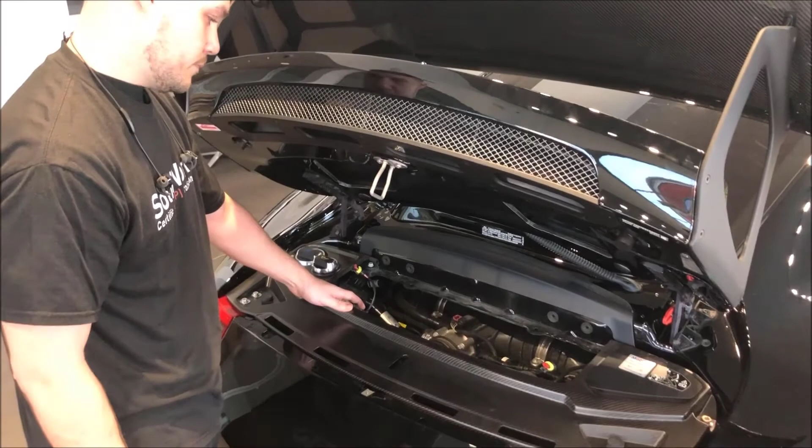So here we are again. So I wanted to check and see really if the car was prepared and set up and it was sound. So with all the work you've put into this thing, is this car ready and can it handle it? What are your thoughts on that? Are you kidding? That's what this car is made for. Do you think the driver could flatten the curve?

Wow, I like that. Speaking of flattening the curve, what engine is in this thing? This one has the Flat 6 4-liter, specifically designed in Germany just for the track. Wow, okay, so really, it's left up to the driver. Let's see if he can bring it, because we obviously know that the car can handle it. Excellent. That's exactly what I. So let's really see what a flat 6 sounds like, to see what our driver is going to be doing for us. That is the

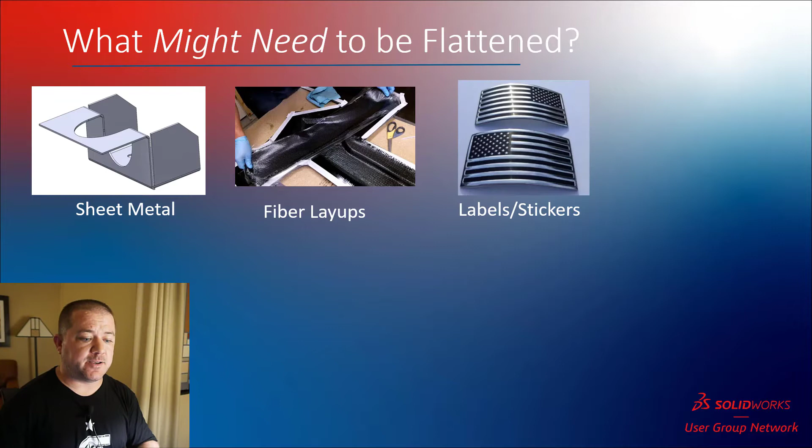When you talk about flattening things, it's important to understand what might need to be flattened. Okay, sheet metal ought to be obvious. That's the first thing that comes to mind. But what about things like fiber layups, right? You're putting sheets of fiberglass or carbon fiber into a mold. Maybe you're making a label or a sticker or something that's got a form fit over another part. Maybe you're doing NC cutting.

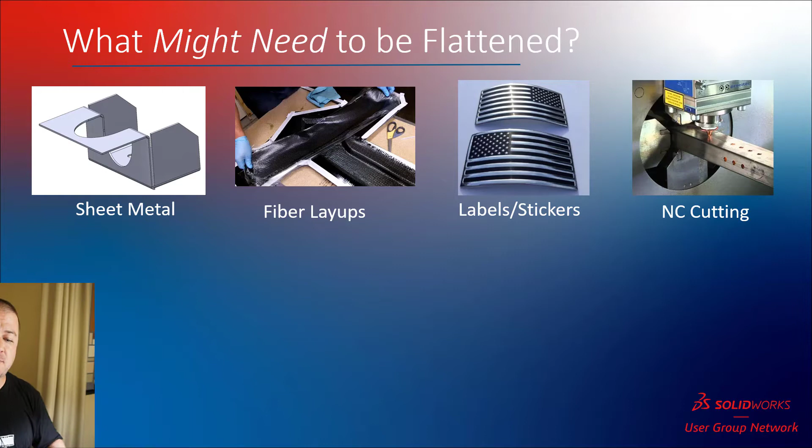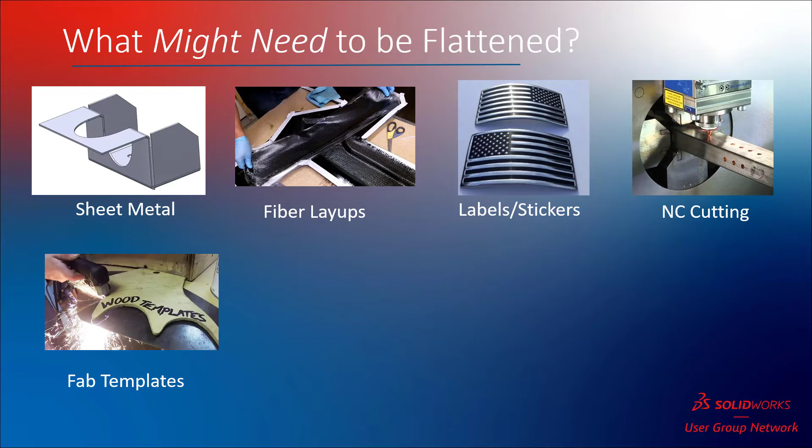A lot of tube cutters cut as a flat shape, but they're actually cutting around the perimeter of that tube part. So you're going to cut the holes all the way around, and then you're going to flatten that out and send it over to the NC machine. Sometimes you've got fab templates where you're creating something really weird shaped or possibly something that's almost impossible to measure. And so you're looking for some way to transfer the design using paper or something else that tends to be flat. You start to get into things like fabric and upholstery, then you start to get into stretch, and that starts to get a little bit more complicated.

Thermoforming, you don't generally actually need to flatten. You always thought thermoforming would need to be flattened, but you're always taking just a rectangular or whatever the machine takes, and then you just trim it off when you're done. So keep that in mind, that sometimes you need to flatten something, but the flat pattern is actually not important at all because the machine needs to have square stock. We also got cardboard, packaging, all kinds of stuff. The possibilities of what might need to be flattened is a pretty big list.

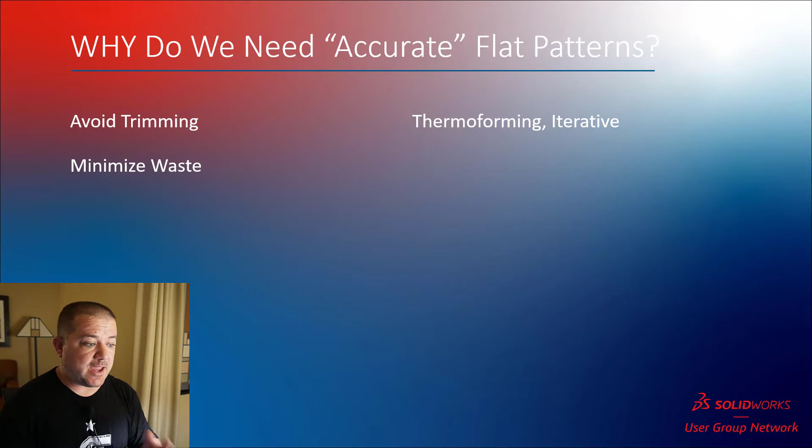The question then becomes, okay, why do we need an accurate flat pattern? Because I'll just give you a rectangle every single time, and as long as it's a big enough rectangle, boom, there's your flat pattern, right? Just trim to fit, beat to fit, paint to match, right? So we want accurate flat patterns so that we can avoid trimming, which doesn't always apply. Thermoforming doesn't matter. An iterative design process: if you're not married to the design, you don't actually care about the extra time it takes to trim a prototype. So don't worry. Does it really need to be that accurate?

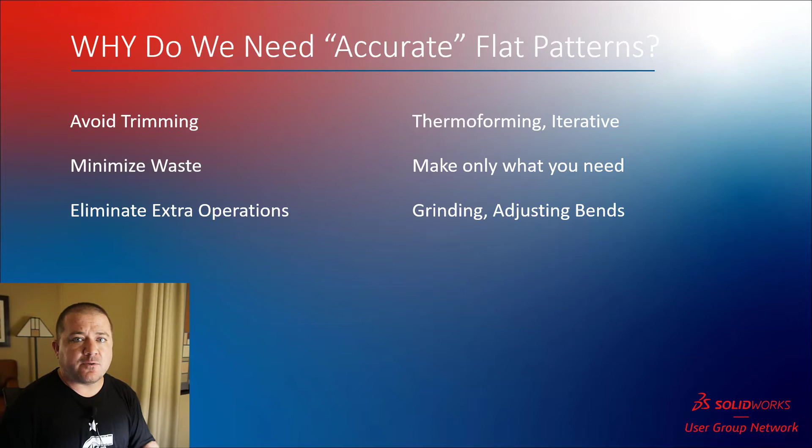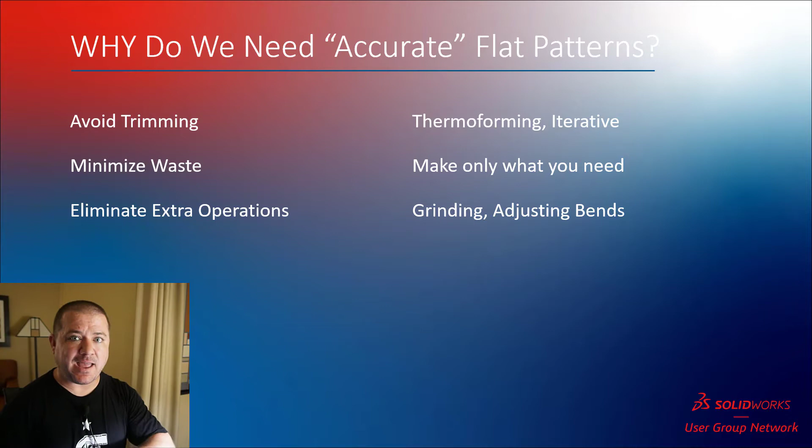You do want to minimize your waste because you only want to make what you need. So trimming extra stuff not only is wasted energy, but it's also wasted material that you could have put into another part. You want to eliminate those extra operations. A lot of times I find that if the flat pattern isn't right, you find yourself trying to dial in the bends. You want your bend locations and your flat patterns to be perfect so there's no excess at the end, no remainder. You want it to look really professional. You want tight, clean corners. You want to take advantage of the ridiculous accuracy that you get on a CNC machine, right?

Whether you're talking about a router, laser, plasma, whatever, you can flatten something and cut it out down to 1,000th of an inch, generally speaking, not necessarily repeatedly, but generally speaking, it's super accurate. And so then you can take that and use that as your assembly guides. You can make highly accurate parts, even though they need to be formed up.

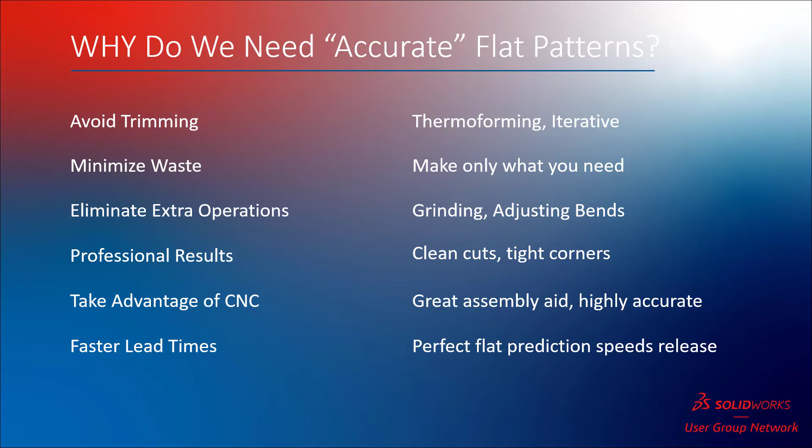If you know your parts are going to be accurate, you can get the parts out the door faster. You don't have to make a bunch of extras. You can just say, yep, I need 5. I'm going to print 5. I'm going to bend 5, and it's going to be perfect because I know it is every time I've got it dialed in.

Let's talk real quick about the anatomy of a sheet metal part that is a challenge to potentially work with. So what you end up doing is you look at a part that's crazy, and you say, okay, I could do it a lot of different ways, but first things first, focus on the largest part of the bends. Trace the outline and use a base flange, or if it's a rolled form, draw the arc of that roll. Try to get the bend in there first, because if you build the bend with sheet metal features, it's going to be a lot easier.

Now, for a really challenging part, you may have features that need to be added to the bent part, as well as features that need to be added to the flat part. So in this case, I'm trying to create a perfectly oval sticker or placard or something like that. And so I create the nice roll, because I'm not going to be able to roll it very well after it is turned into an ellipse or an oval. So I create the roll, I flatten it, I cut the ellipse out, and then I fold it back, and the flat pattern must solve.

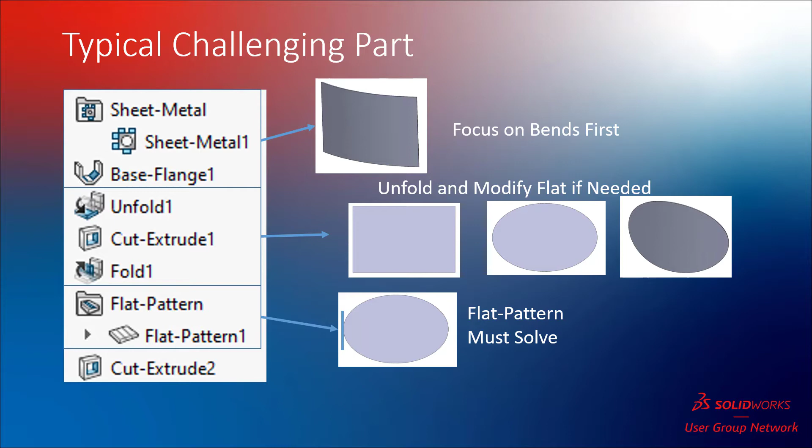Now, you may think, okay, well, that's obvious, but for those of you that have tried it, you know that at least in the past, you had to have at least one small straight edge to roll that back out with on a flat pattern. And so what I did here is on my ellipse, I left the tiniest little straight edge. And that straight edge allowed it to flatten, and then I did some cleanup at the end.

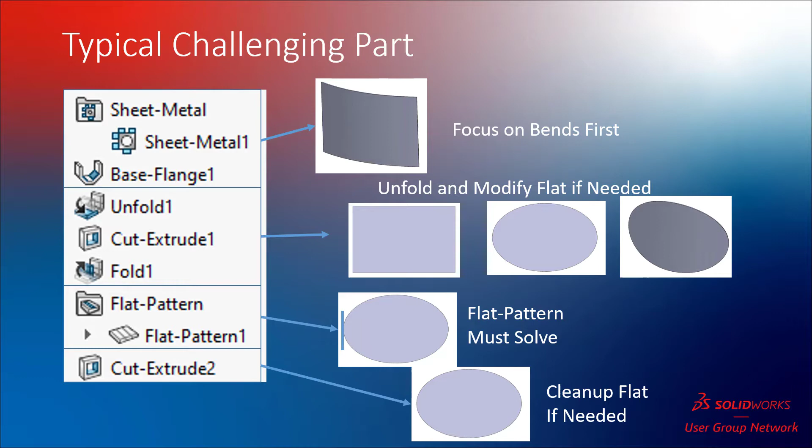So that's kind of how a lot of these parts end up going. You end up working on it in multiple phases: the bent, the flattened or semi-flattened or in-process flattened, the flat part, and then anything after the flat part that needs to be applied to make that work.

All right, let's talk about the rules. Sheet metal has rules, and just like rules in the real world, if you break big rules, you got big problems. If you break small rules, you probably get away with it, nobody's going to care. And if you break enough small rules, you're probably going to be cruising for trouble. So follow the rules when possible. If you can't, I understand. SolidWorks is probably going to take care of you, like we'll see here in a second.

So one rule, constant thickness. In other words, if you're going to have 16 gauge sheet metal, it's got to be 16 gauge. You can't create a chamfer on one edge and sharpen it, because that creates a situation where it's not the same thickness there at the corners. So constant thickness. The exceptions being that you can create non-normal cuts and do a lot of stuff with them.

Also, if you have something that's going to end up stretching, like a formed part that's drawn out, theoretically that's going to change thickness in the real world. We're not going to calculate that. We're assuming the thickness stays constant even though you're getting a bunch of stretch. Sometimes with imported parts, the constant thickness is messed up, and sometimes with convert to sheet metal, you can't have it flat. You don't want it to be thin. You want it to be a big chunky block, and then you just convert it.

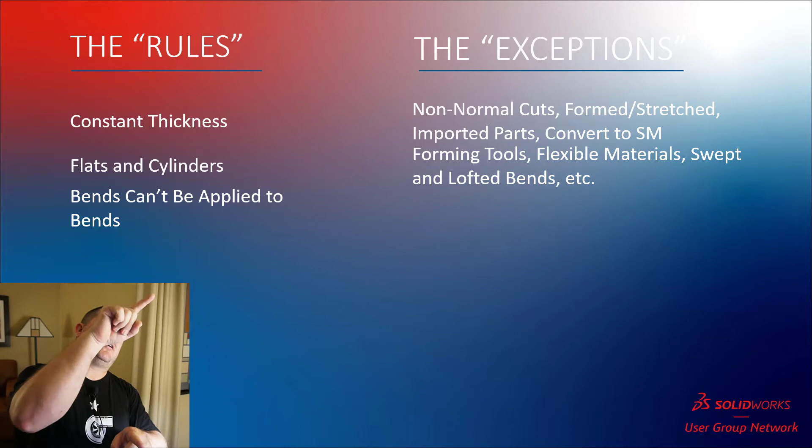You can't apply bends to bends pre-2020. They've changed this. It used to be, if you're on an older version, this does apply, an arc touching another arc with no straight in the middle would be a problem. Or even worse, an arc that then just took off in another direction. That's a bend on top of a bend that's going to get added on top of another bend. It just gets crazy. SolidWorks is like, you know what, I'll just take care of that for you.

So if you've ever run into a problem in the past where your lofted bend or swept bend or something like that didn't flatten, it probably does now with no problem. It's just boom, automatic.

You can't have parts that are overlapped. For instance, when they bend, if the parts are overlapping or intersecting, it can't physically happen, and it can't intersect in the flat. But there are times when, for whatever reason, you need to cheat, and SolidWorks generally is okay with you cheating. It generally gives you ridiculous, impossible things and lets you decide, is that something that I can accommodate through other means, right?

Through stitching sheets together to create a flat that's impossible from a single sheet, but maybe it's from multiple sheets. Or maybe you've got two parts that need to touch because they're going to get spot welded together. Generally, that's going to work out fine, but just keep in mind, if you can keep a small gap in there, you're going to be better off.

The part needs to be manufacturable, and of course this is all sort of just up to you because you're the one that's stuck with it if you can't manufacture it. But there are some really cool tools out there where you can create, you know, completely enclosed cubes, for example. I mean, if you're making it out of a piece of paper or cardboard, then you can bend anything, right?

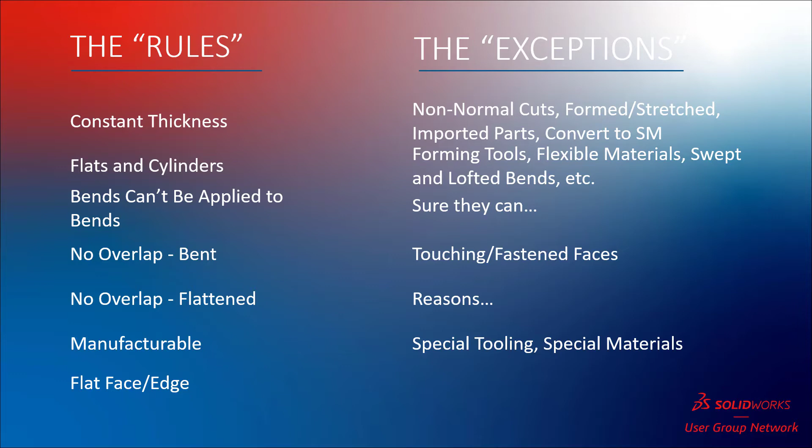So the last one, you need to have a flat face or a flat edge, and that's because the flat pattern feature at the bottom of the feature tree has to have something to say this is the fixed edge or fixed face. It's got to flatten relative to some fixed object. So make sure you have a flat face or flat edge.

That one's a pretty good one, although keep in mind, kind of like with that elliptical label example I did just a second ago, you can have a flat edge that exists in the flat pattern, but then gets sort of trimmed or eliminated after the flat pattern in a post feature. Okay.

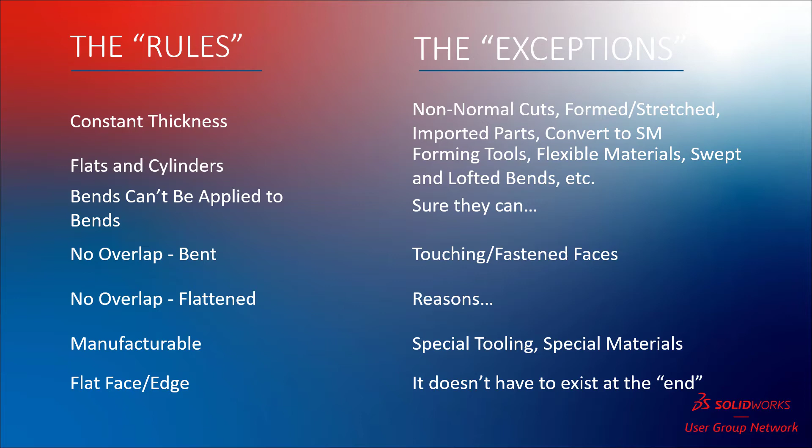This is required knowledge. You need to understand bend allowance, bend deduction, K-factor, etc. Generally speaking, when you go and talk to the guy that runs your brakes, the guy that runs your lasers, everybody that works with sheet metal, and you ask them, explain to me what bend allowance is versus bend deduction, and why would I use one or the other, you will get a different answer from every single person you talk to.

The thing of it is, bend allowance, bend deduction, those are old school AutoCAD 2D rules of thumb. They work really well, but they were based off of the same dies on the same material, and if you have a different bend angle or a different bend radius or a different die set or a different humidity in the air, it's going to stretch a different amount. And you'd have to manually keep track of this all. So I don't recommend using anything but K-factor just for simplicity's sake. I'm lazy and you should be too.

So K-factor is usually 0.3 to 0.5, and the idea is K-factor is the percentage through the thickness that you're not getting either compression or expansion in the material. When you bend, it's compressing on the inside, expanding on the outside. Somewhere along there is a neutral line. If it's perfect, then that neutral line is exactly halfway through, and that's a 0.5 K-factor, which is the default SolidWorks value.

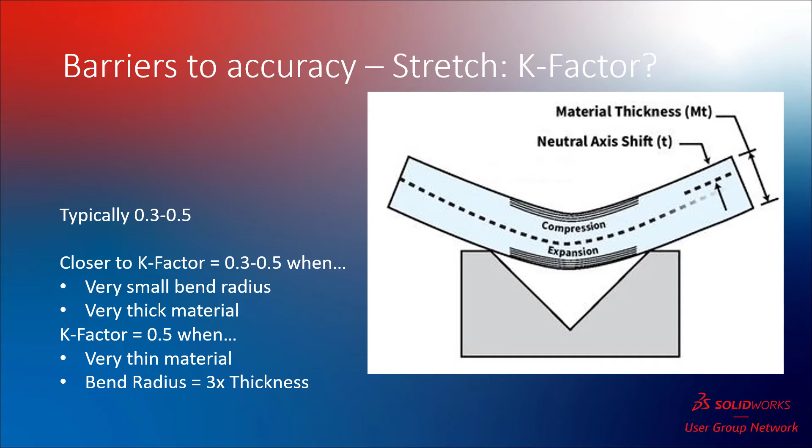It also helps to understand which direction you're solving for, because depending on what direction you're solving for, that's going to be where that K-factor applies. So for example, let's say you're doing a rolled cylinder, you know what the diameter of that rolled cylinder needs to be, you know the folded part. You design it in SolidWorks and you solve for the flat. If you adjust the K-factor, that tube will not change size, but the flat will. It'll get longer or it'll get shorter.

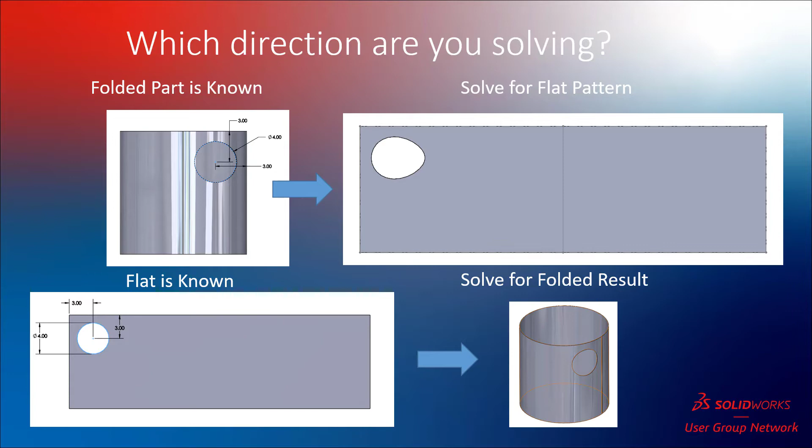Now, if you know what the flat needs to be, such as you want to cut a round hole because you're using a punch, but then you're going to roll it up and you want to see what the shape is, you'll build it in the flat and then you'll roll it up. In that case, the K-factor is applied to the folded part. You always have to start with one or the other, and in fact, you can mix and match, but every feature has a design intent. The K-factor is translating from one design to the other.

And what do I mean by one design to the other? I mean, you've got two designs. You've got the flat and the folded. And they differ by, theoretically, a K-factor, and that's it. But in reality, sometimes you've got to get more creative than that. So let's do some examples. Let's start with just some regular sheet metal features. Just do something fun here.

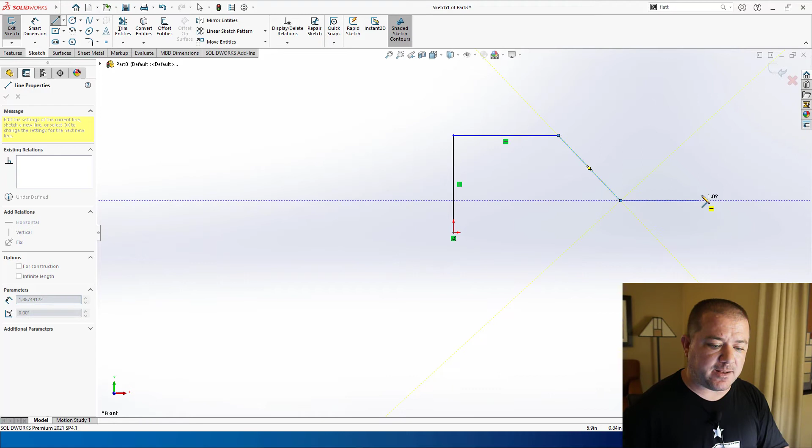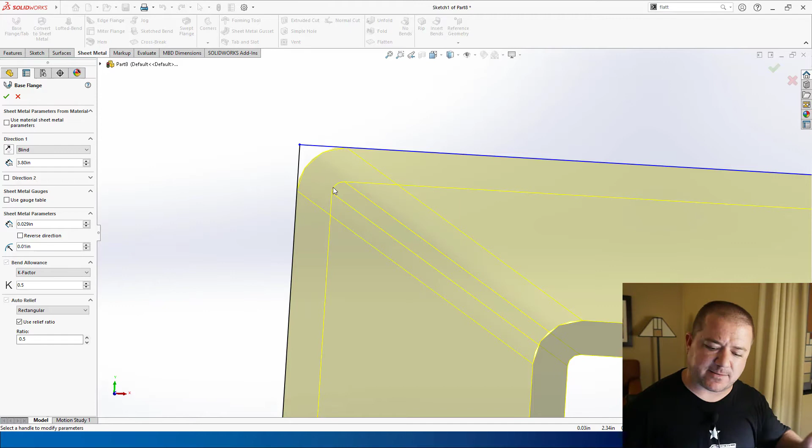So I'm going to go ahead and create a new part, real simple. And when I do a new part like this, especially in sheet metal, I like to try to get as many of the bends in there as I can initially. Then let's just create a weird shape. And we'll come up here to sheet metal and do a base flange. When you're doing sheet metal, you're almost always either going to be right on or you're going to be off by a thickness or two. Because if you're not paying attention to the thickness being to the inside or the outside, classic design intent mistake, you're going to have problems.

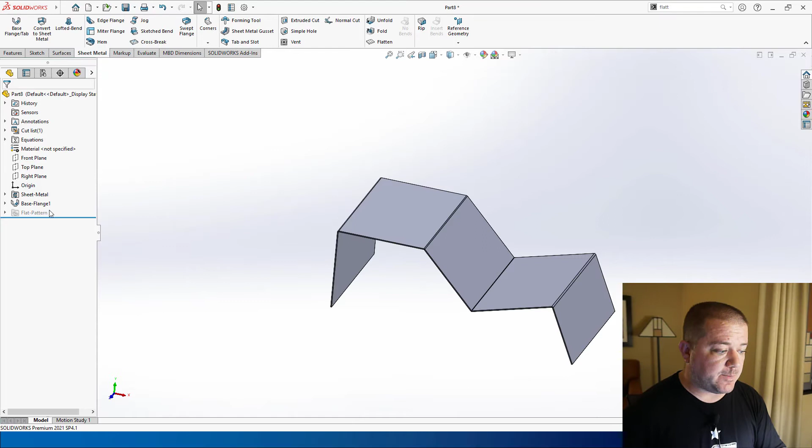So we're not focusing too much upon the sheet metal specifically, but if I come in here and I draw an open profile and I do a base flange, it creates a sheet metal part. And as long as you just periodically check, yep, it can be flattened, you're good to go. All right? Now keep in mind, remember I said you had to have a flat face or a flat edge? That's because this flat pattern feature here specifies where it's flattening from, and that stays put.

So if you ever decide, no, I want this to stay put and everything flattens relative to that, you can do that. I kind of liked it the other way. I'll switch it back real quick because that one seems to be more convenient. But if you ever have your flat pattern off at some weird, crazy angle, pick one that's sort of square with the world. You've got a bunch of other features, and as long as you do something in sheet metal and SolidWorks says it's a valid sheet metal feature, you should be good to go, right?

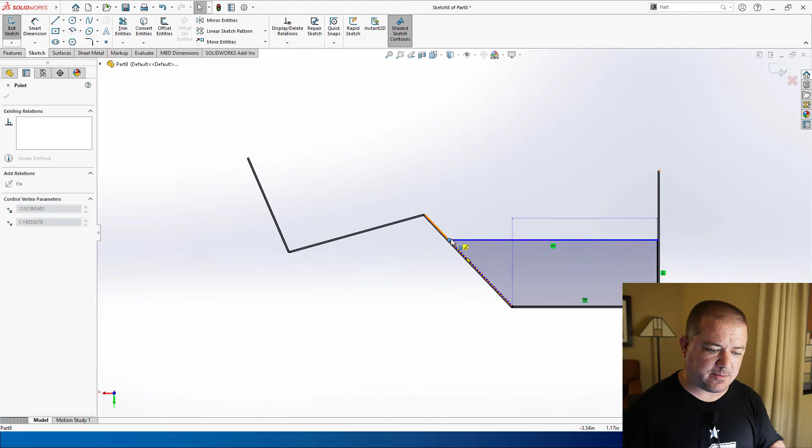So here's an edge flange, and I'm just going to come in here and modify this a little bit to make it line up here. That looks pretty good. This one actually blew up, probably because I tried to overlap. And remember what we talked about, you cannot have overlapping parts or touching faces. So we'll make this where it's not so mad.

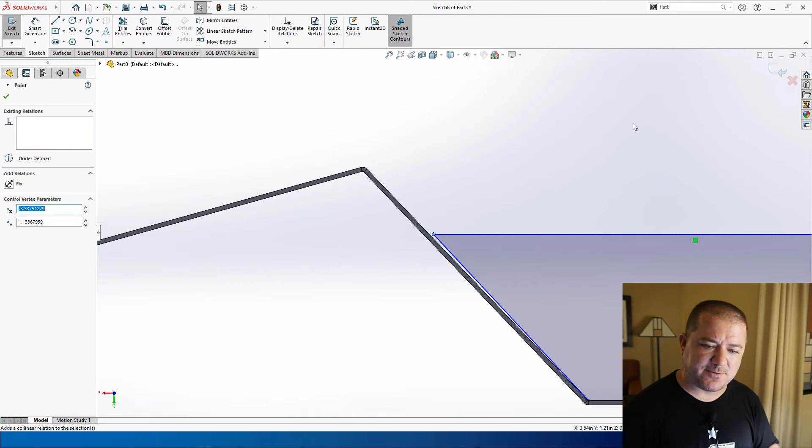And I've got auto rotate normal turned on because this is a brand new install. We'll tolerate that. Okay, so there's an edge flange. It flattens, right? No big deal. You've also got miter flange. If you do a miter flange, here's a little tip.

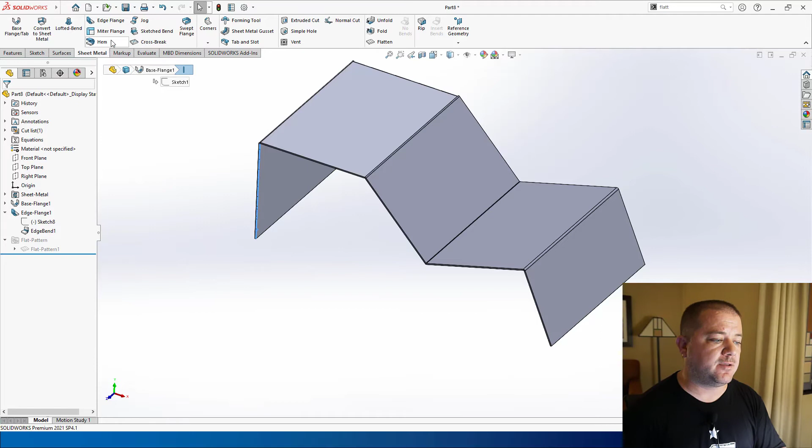Grab the edge you want the miter flange to start at, near the edge where you want to draw it, then hit the miter flange command. Oh, actually, you've got to do it the other way around. Do the miter flange command, then click the edge. It creates a plane with the origin at the point, and as long as your profile is attached to that origin of that sketch, you're going to be good to go.

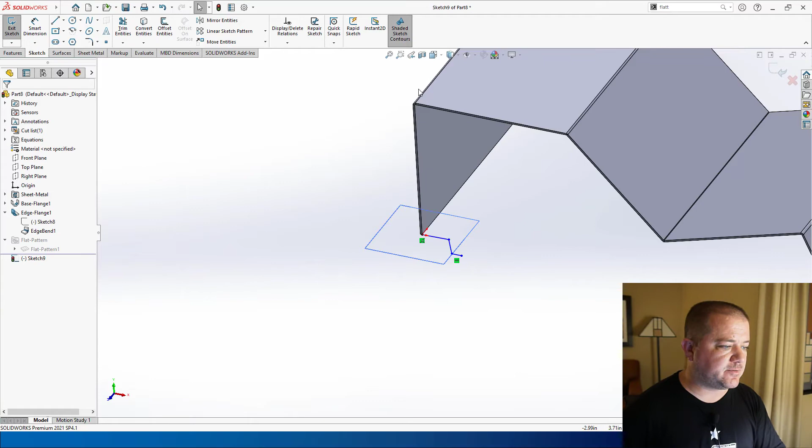So I'll just do one of these little dudes and click OK. Just kind of freestyling here. And propagate tangency goes through and does a nice job of taking that shape and creating a whole bunch of bends really quickly. Again, let's check and make sure. Yep, flattens no problem, other than that's interesting.

So that guy's giving me trouble. Let me try one more time real quick. I'm going to just turn that back to vertical and see what that looks like, because I don't really want to create a problem that later on is going to bite me, because I'm going to do some weird stuff.

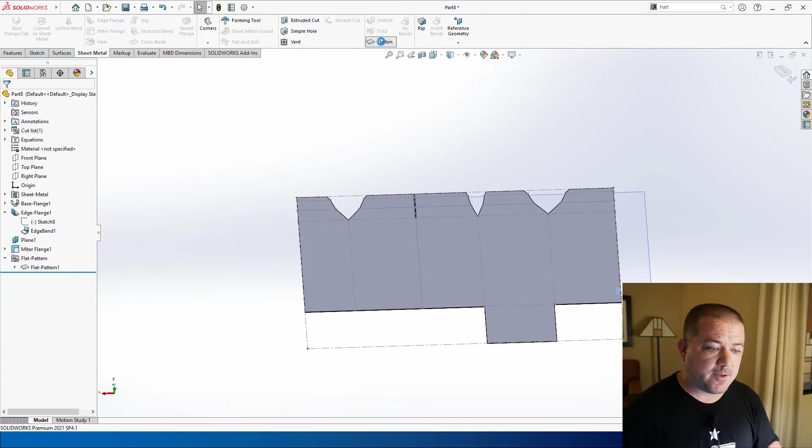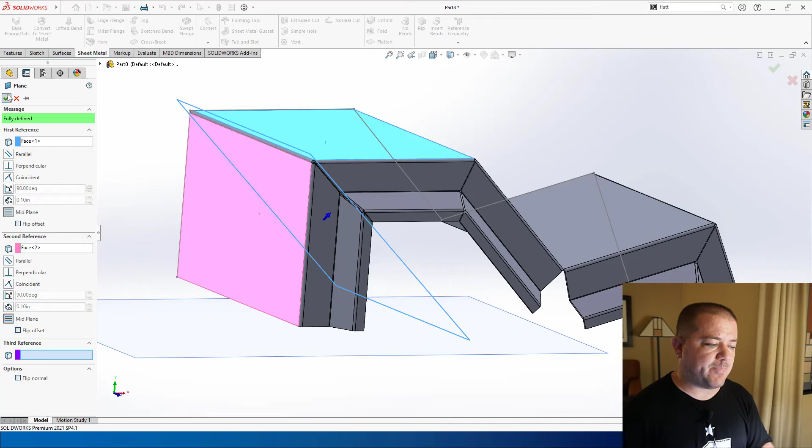All right, next thing I want to do is create a cut. And this is one of my favorite tips, shortcuts, whatever, with the new plane feature back in, I don't know, 08, or probably 18. Pick a couple faces, create a plane, it creates your symmetry. It back calculates a symmetry plane, which happens to be a perfect 45 on two normal faces.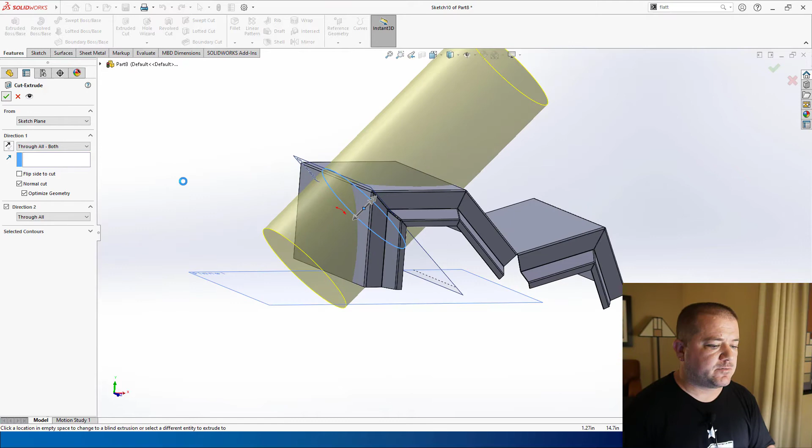All right, I want to run a pipe through all these faces in the sheet metal, right? It's a pretty common thing. Sheet metal has some hose, some structural pipe or something like that going right through it. So I run this cut all the way through, all in both. And by default, it turns on normal cut.

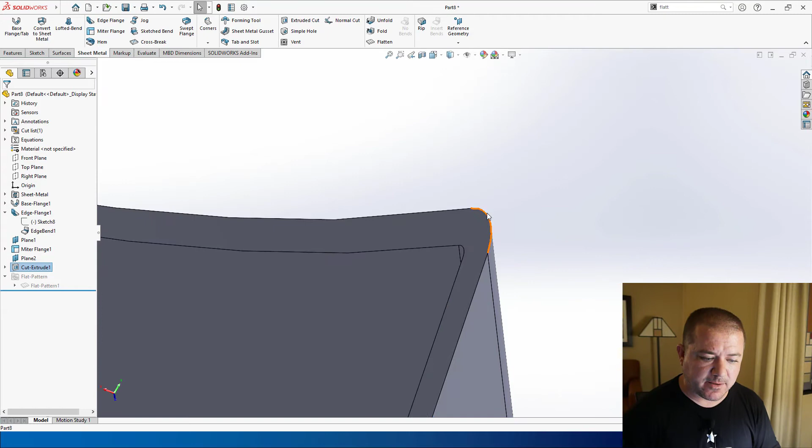And normal cut means it's going to cut a straight cut normal to the surface, so that when you flatten it over here, you've got nice, clean, straight cuts and everything's fine. Okay? If you want that to have sharp edges, you can turn off the normal cut, but you're going to break a rule. So if you're using an old version of SolidWorks, this is now going to hate you. But check it out, it's got a really sharp edge right there. It's going to slice your finger while you're holding the part, unless you deburr it.

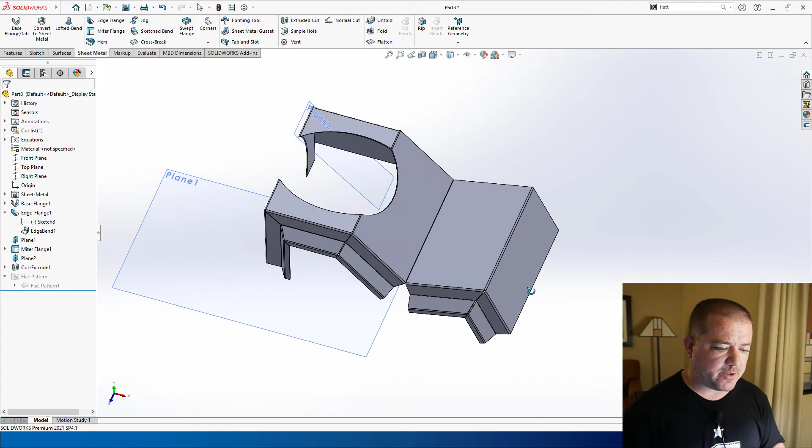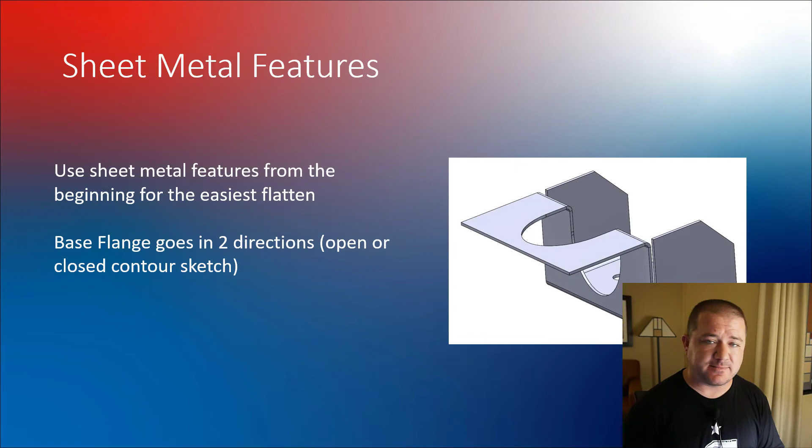But it'll still flatten. Yep, don't call me a liar, SolidWorks. You break enough rules and SolidWorks gets a little touchy. But you break a couple rules and generally SolidWorks is going to be fine with it. All right, so that's looking pretty good. At this point, you kind of get the idea, right? If you start with sheet metal features and stay with sheet metal features, you should be fine. It's going to work out. That's the easiest thing you can possibly do.

Insert bends is a really great way to take a part that's theoretically already sheet metal and add sheet metal features. So if you've got a bunch of old Pro E sheet metal parts, step files, old AutoCAD 3D parts, whatever, insert bends is absolutely the way to go.

It does have to have flat or cylindrical faces. It doesn't have to have bends. If it has bends, it'll capture them accurately. If it doesn't have bends, if the corners are square, it'll add your defined radius in the bend. So for this one, I'm going to go ahead and open one up real quick. I've got a part on my desktop here that I created earlier.

I had another example on this and I couldn't find it, but this is an imported STEP file and it's just a dumb, for lack of a better word, dumb solid. But if you say insert bends and you pick a flat face, Bob's your uncle, you've got a sheet metal part with intelligence. Pretty awesome, right? That right there is brilliant.

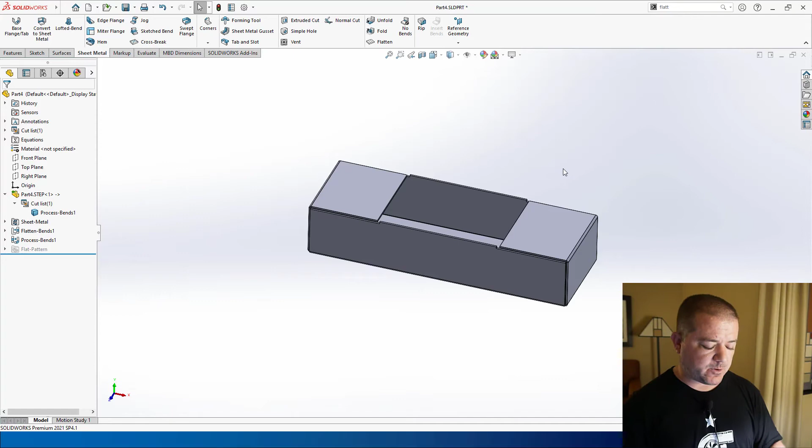And you should always use insert bends whenever you can if it's an imported model. Don't use convert to sheet metal. I'll show you that in a second. That's for other things. But insert bends, man, super stupid simple. Great. Convert to sheet metal.

Now this is one that has really grown over the years. It's constantly been improving. The corners are better, the error handling is better, the ability to handle arcs on arcs on arcs, all better. So this presentation has had to adapt over the years with the improvement in the software.

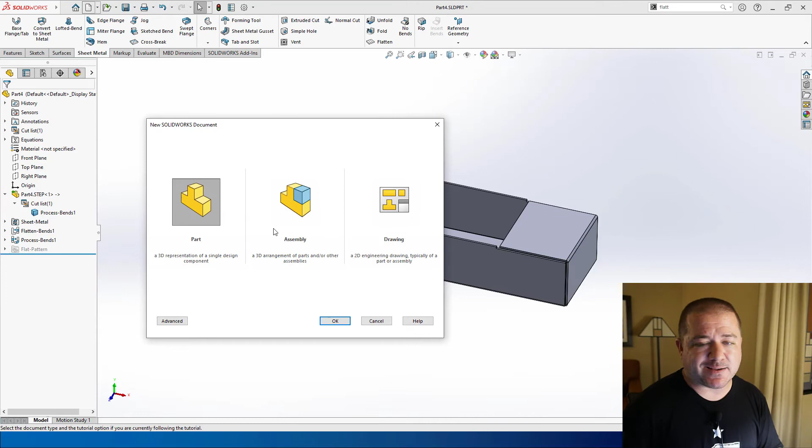But basically, if you've got something stupid or complex, like the classic example is a hopper, and you need to reverse engineer it, or wrap it in sheet metal, or create it out of sheet metal, this is sort of the way to go. And so for this one, just to show you what I would do, I like to just create a really stupid shape. I'm going to add some draft to it.

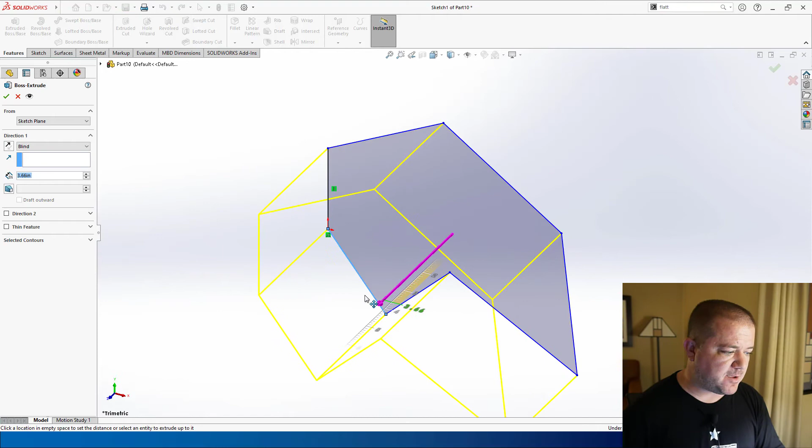And then I'm going to just chop it with, oh, I know. Let's draw a circle. Yeah, this is a terrible idea. We'll see how this works. All right, I want to make a sheet metal part that is this guy right here, right? I want to make a sheet metal housing that is that random drafted cut shape. Convert to sheet metal is your perfect way to do that.

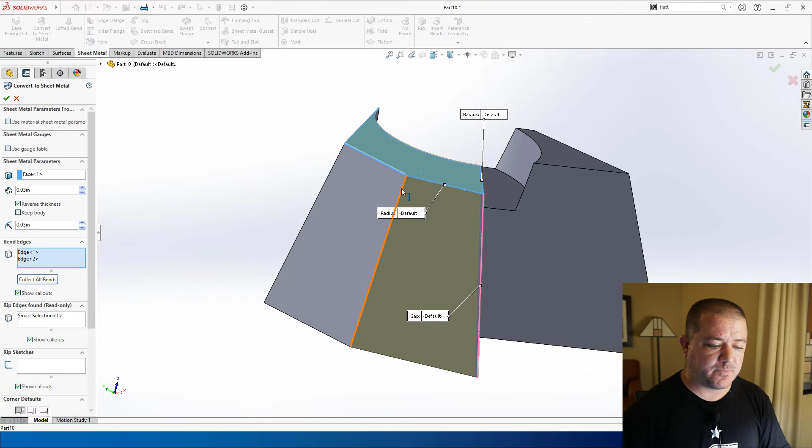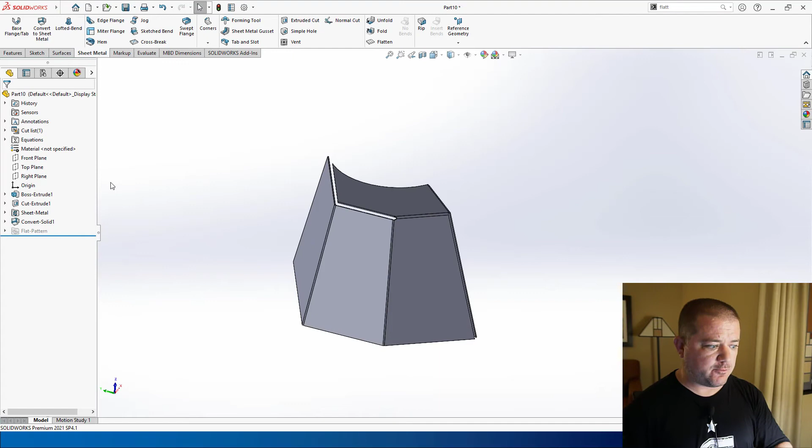And what it does is you say convert to sheet metal, pick a flat face, and then anywhere you grab an edge, it's just going to convert that edge. And if you pick in a weird order, it'll actually flatten in a weird order. So like this one right here, look at that one. If I flatten it, you can see it flattens out, but it actually created bends here, and then it sort of wrapped around the side. So depending on how you grab them will determine how that works.

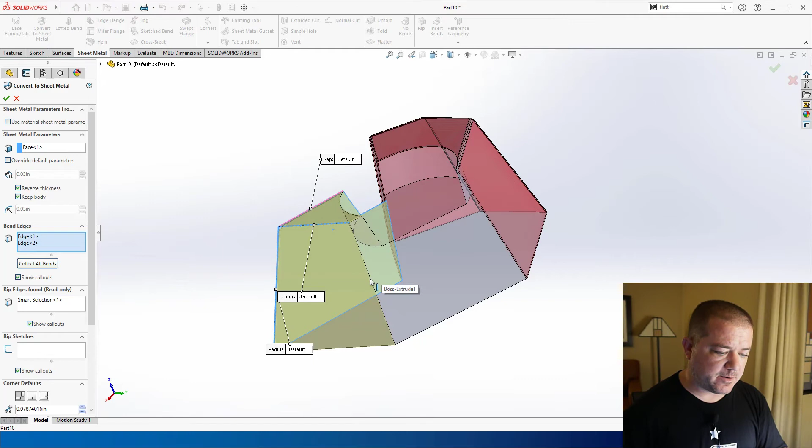Now for this one, I can't possibly make this whole thing out of one piece. If you need to create it out of multiple pieces, check the Keep Body button, and then you can just come in here and convert it again. So let's do this one, grab this edge right here, this edge right here. Now I'm sure this is not going to work. Yep, coplanar. But let's check this guy. Check that bad boy out. Right? I wonder if this will do it. Nope, doesn't like that one either.

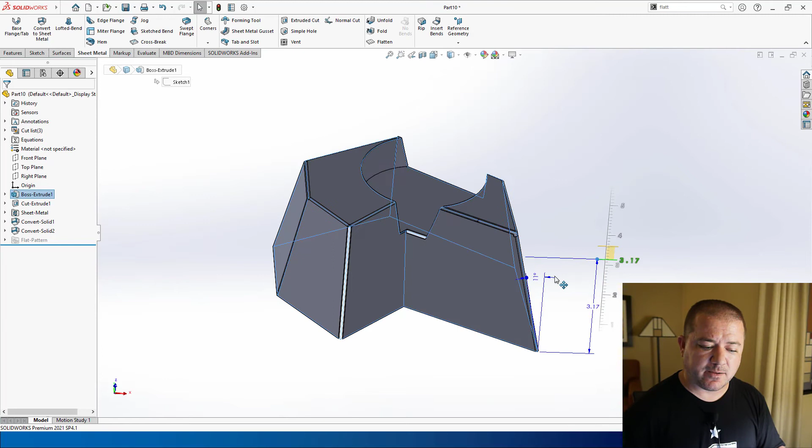So we'll have to come in and figure something out later, but there is a couple of sheet metal parts, very quickly created, and the beauty of it is any changes to the geometry and these flat patterns are going to update right away. Right? Change the draft angle, whatever. Looks like I'm blowing stuff up right and left. That's what you get with a live demo, but hopefully it's enjoyable. So just make sure that it can be flattened. A lot of times you'll see these where they overlap each other. That's on you. You're going to have to fix that.

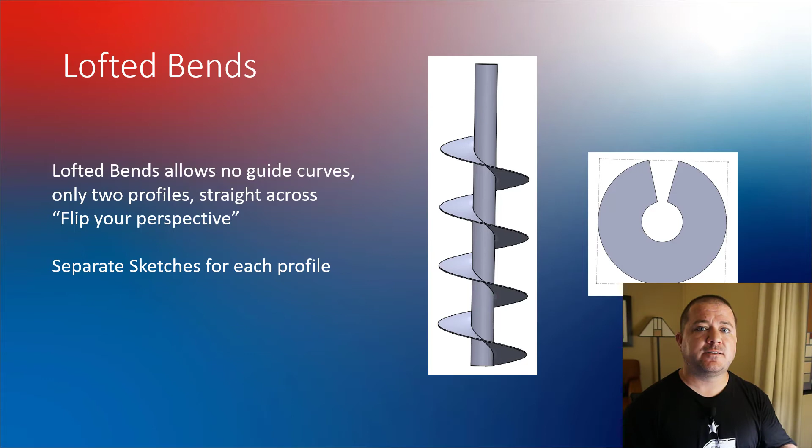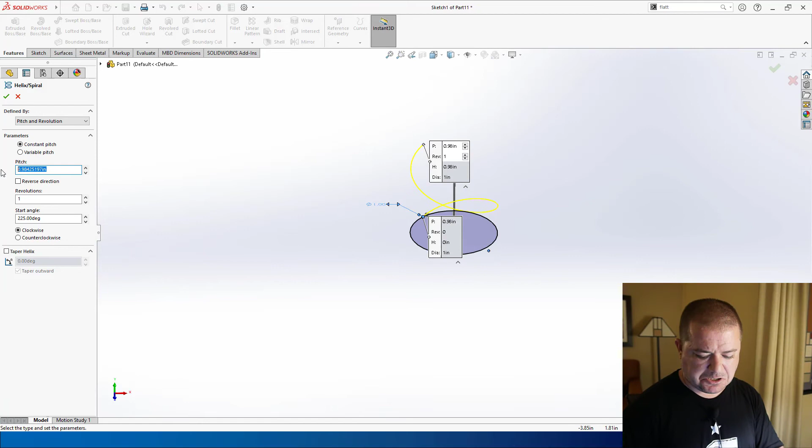But if you think about it, if you use helixes as your profiles, then they are straight across to the other side. Let's make one real quick, because this is a fun one. You basically just start a sketch. Let's do like a 1-inch hub on this guy. We'll do the first one first. And we'll go in here and say helix. And we want to do a 3-inch pitch, 1 revolution, start at 0 degrees.

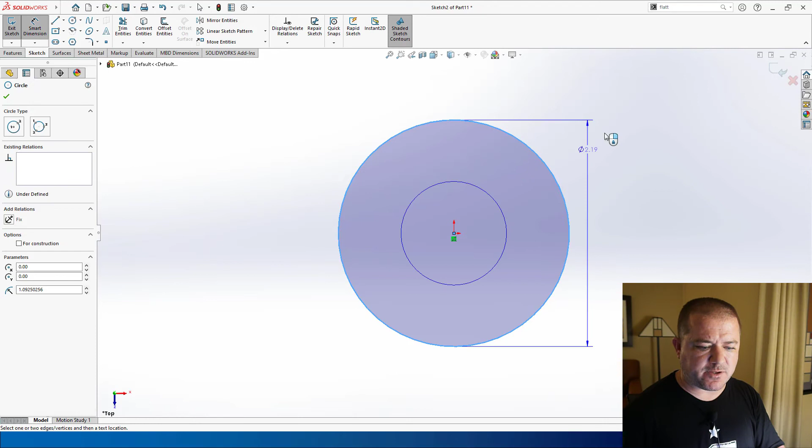Looks good. Now we'll do another one. Start a sketch, draw my circle, and we'll do this with like a 4-inch OD. So we're wrapping a 4-inch auger around a 1-inch post. Again, we'll do a helix, same pitch, starting revolution, everything like that.

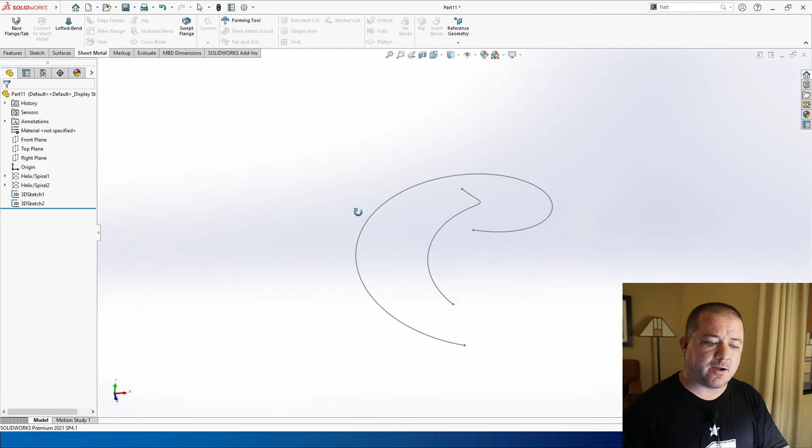You cannot create sheet metal lofted bend from a curve. So you got to do a couple additional quick steps. You got to create a 3D sketch for each one and convert it. There's 1. Here's 2. I find it's useful to hide my helix, otherwise you're going to accidentally grab it. The sheet metal's going to get mad. But there is a loft where those would have normally been my guide curves. I can now lofted bend from one to the other, from here to here.

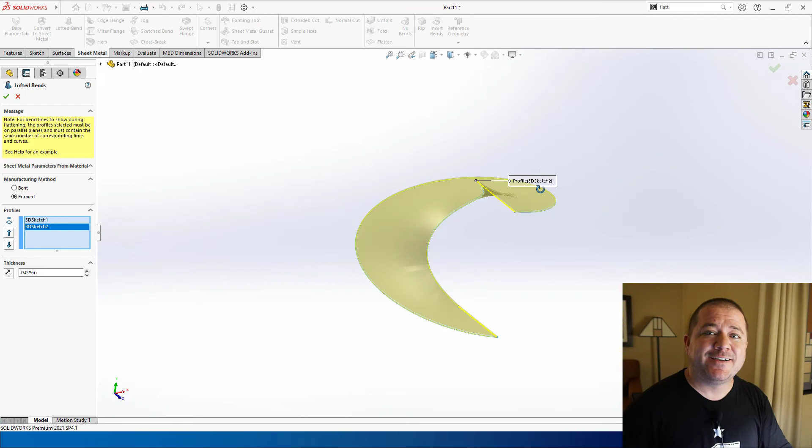Now, this is going to be a formed part. You cannot approximate this on a brake press. No matter how good you are with the brake press, that ain't going to work, right? You're gonna end up forming this with a hammer or something. But it does a nice job, and it flattens with no problem, right? Makes quick work of building an auger.

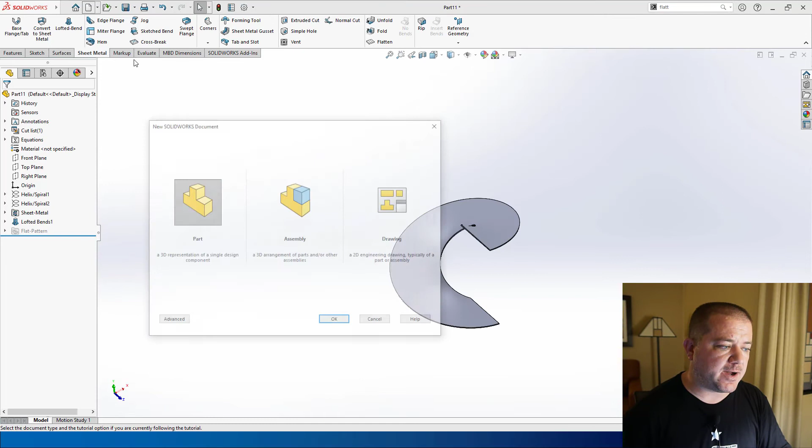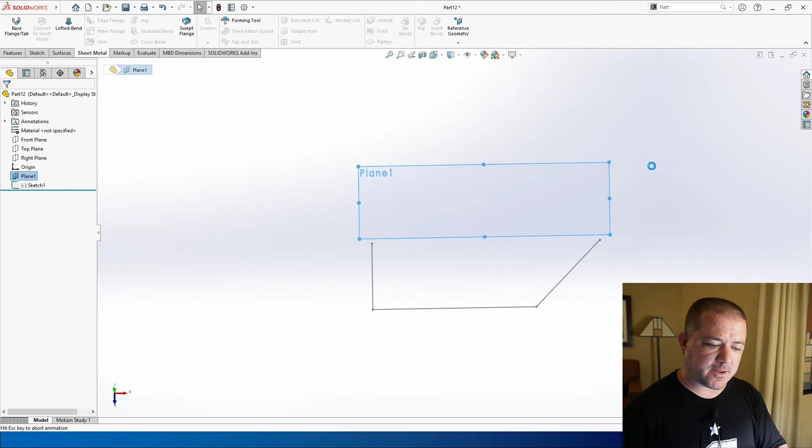If you need to do one where it's going to be approximated by a brake press, that's where you're going to have kind of that more classic, squared around. Or what's more likely or more common is maybe half a squared around. So you're doing like, let's do kind of a weird shape there. And then we'll go to like an arc here. Center point arc. Right? Lofted bend from there to there. This one can theoretically be approximated on a brake press, just like that. And so if you have something that can be approximated using straight lines, you're good to go.

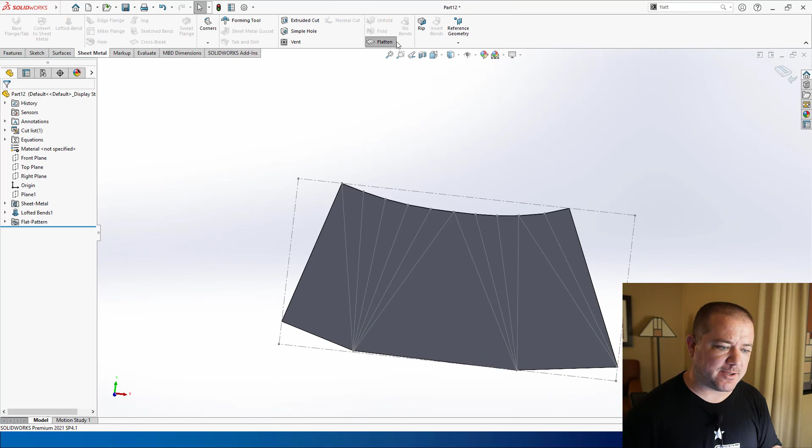This used to be so much harder. You had to do straight line to straight line. They had to be parallel. They had to be connected. Now it's just so easy. This presentation has gotten so much easier. I used to be always the stump the chump guy on support. Somebody's got something they can't flatten. They're like, "Hey, Marcus, you try to flatten this?" I'm like, "Yeah." My job's so much easier these days. So that's looking pretty good. Make sure it flattens. Looks good. Feeling good. Man, SolidWorks is just crushing it right now.

So are you flattening it along the path, like it's going to be rolled like seamless guttering from a straight strip? Or are you sort of flattening it from the side and sort of bending flanges down to form those shapes? Those are the two. I've been having problems with some of the flattening on that. I haven't looked at it again in a while. So it's a little bit weird, but you can get some pretty complex stuff there. Again, you may have to flip your perspective, right? If you think, okay, well, I can't do it that way because it's not a single profile. What if you do it from the side, do it sideways?

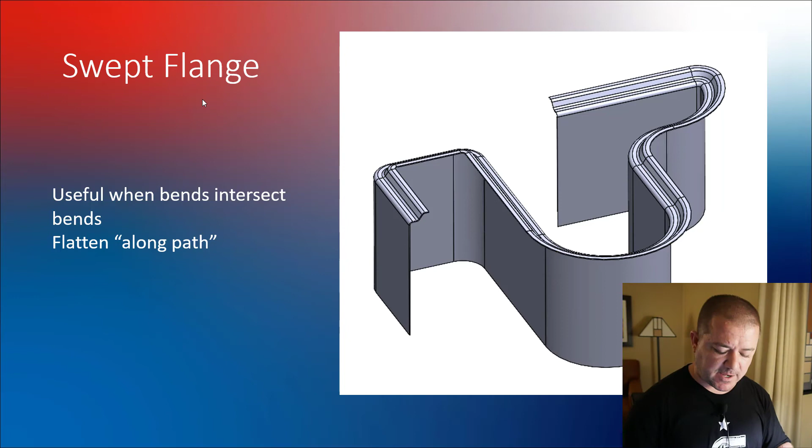Surface flatten. Right now we're getting really weird because surface flatten is a situation where it's not sheet metal, right? The auger is technically not sheet metal because you can't bend it on a brake press, but that depends on how you define what is sheet metal. You can do things that are non-planar, like drawing of metal. But surface flatten is when you really start to get some really crazy stuff going. It's about the most powerful thing you can do in SolidWorks when it comes to flattening things.

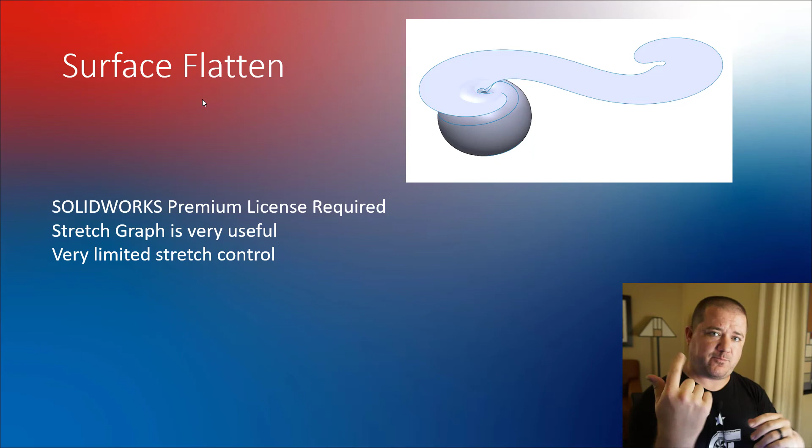I was doing a sheet metal training class one day, and I said, I bet I could flatten everything. And it's kind of the genesis of this presentation. And somebody said, "Can you flatten an orange peel?" And I said, "What shape? Right? Do you want it like a flower? Do you want it peeled in a helix?" And he said, "I want a helix." And so I did. And the different ways that you can do this vary because some of these get a little bit complicated. But let me roll this back here.

Here's one way that works probably better than the surfacing, because the surfacing can get a little bit difficult. You just create any shape you want, and then you go in and cut it with a thin rectangular cut. In this case, I did it as a swept cut on a helix and cut everywhere I wanted it to peel away, which is where the cuts would actually be, and then surface flatten. And it just flattens it.

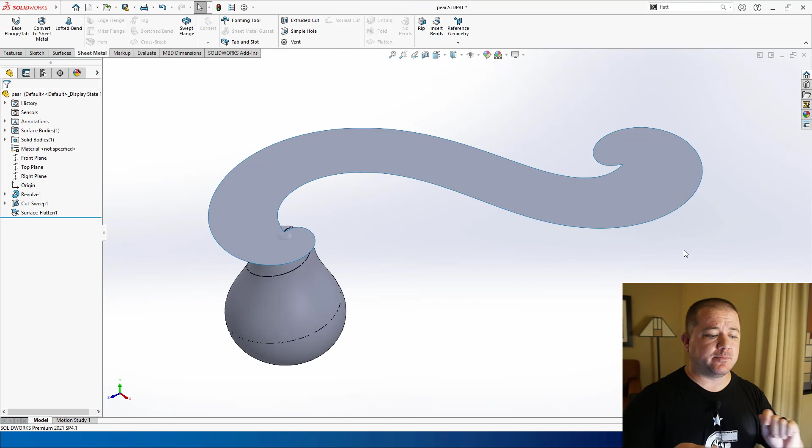Up on our social media for MLC CAD systems, I've got a picture of an apple peel that my wife did because she knew I did this presentation, so she peeled it in a spiral, and it looks exactly like this. Every time it looks this way, and you can predict it with some really great accuracy how it works.

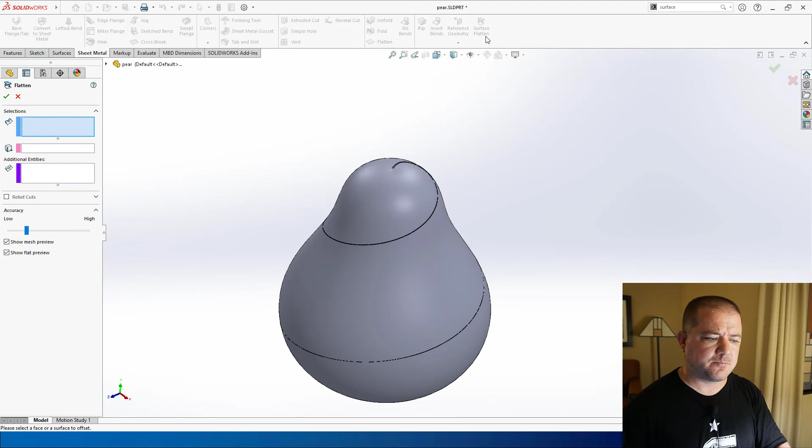To show you that last step, because preparation to here can get a little bit crazy, but once you get to the point where you have something that can be flattened, you just come in and grab the surface flatten command, and I usually have that on my toolbar. Surface flatten. Let me add that here. You pick the face you want to flatten, and then pick where you want to flatten it from. You have to start from a point of some kind, and depending on where you pick that point, that might determine exactly how it does it.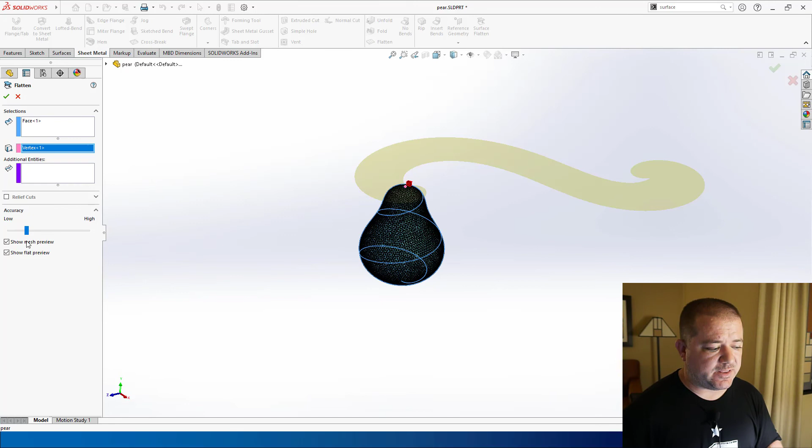But it's almost doing FEA on this thing. It just meshes it, and then it does it. You can adjust the accuracy. You can add relief cuts. But there you go.

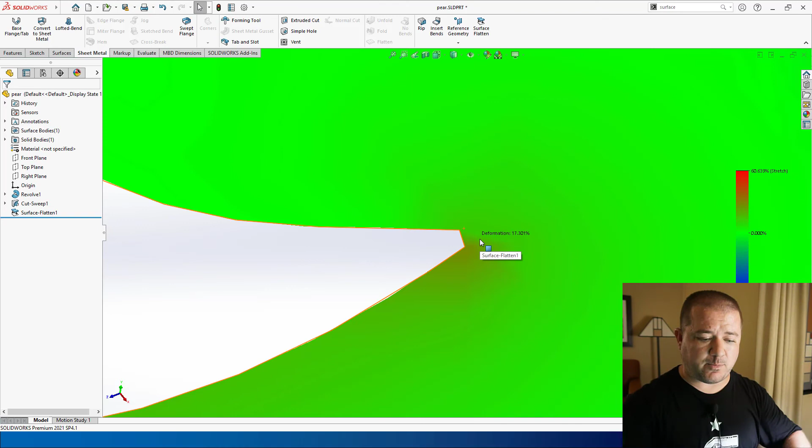The only other thing that's worth looking at is that you can right click and turn on the deformation plot. This is where you're going to start to see it either wrinkling or tearing because there's tension or compression. So this one has a lot of stretch right there at the top, and if you've ever tried to peel right down to that nub, that stem, you know that right inside there is a lot of stretch going on because it's sort of being turned inside out. Then you get a little bit of compression depending on how thick you make the peel.

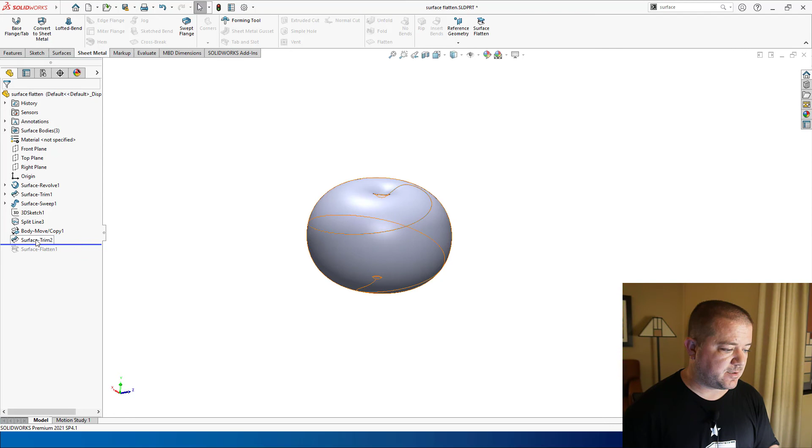I've got another one of these that I did, another approach using surfacing, but a couple of years ago that kind of broke it. With surfacing, you just have to make sure that the surfaces are not overlapping, so you typically need to cut a little hole in the middle, where you don't need to worry about that on a solid. But as long as you can trim the features, you should be good to go. Now this one, if it's anything like it was in 2020, I would try to do that and it would actually break. But in this case, this one's a little different.

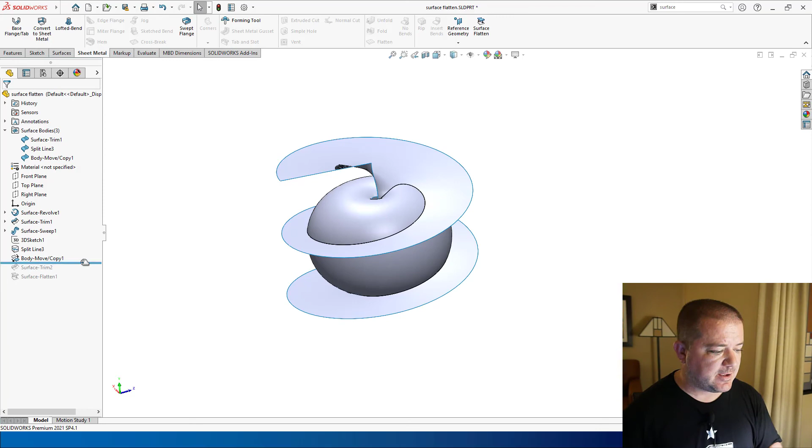I do the surface revolve, right? And then I come in and do my sweep. Then I do some split lines at the intersection. I copy the body so that I have two very close nearby surfaces. Then I trim them. You end up with like 18 features to get this done. It takes way too much time. The solid one I did as a workaround, and found out it worked a whole lot better. I was trying to be cute with surfaces.

Which brings me to sort of the bottom of the bucket, the bottom of the barrel. When you can't flatten it using one of those features, you've got to cheat. And as far as I'm concerned, cheating is totally acceptable. So for example, this was on a crimp connector where a little window was being bent out along the cylindrical face.

Remember when I said that sheet metal needs to be flat faces and cylinders? Well, if you put a bend on a bend, normal to a bend, it creates this toroid donut shape, and that's just a no-go. You can't put bends on bends. They're constantly making it better, so they're going to make me a liar in a couple years, but this is just a no-go. But the trick with this one is you don't need to know what the flat and the bent parts look like. You actually already know that. So why worry about SolidWorks figuring it out when you can just tell SolidWorks?

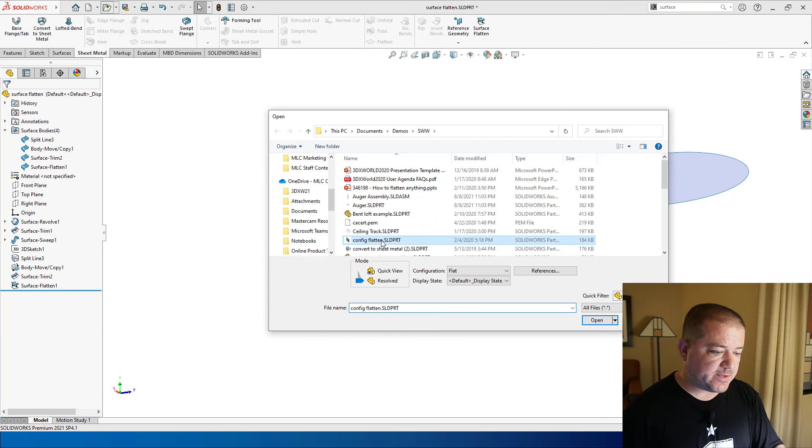So in this one, I did this one ahead of time because I didn't want to have to sit there and try to recreate it. But basically what you're doing, and I'll show you my feature tree, right? There is my bent part, and here is my flat part. And you're thinking, wow, that seems really simple. Bent part, flat part, right?

Well, the bent part, I had to do a loft to get this bend region, because you can see it's a bend that's bending, a bending bend. You can't bend bends in sheet metal. I had to do knits and surface thickens and all this other stuff just to get the shape right. And the shape's not perfect because I probably need to come in and like curve the edge here or something like that. But once you get the tooling and the machine that actually does this, you'll know what those measurements are and you can trim it up and make it look realistic. But I had to build that geometry completely.

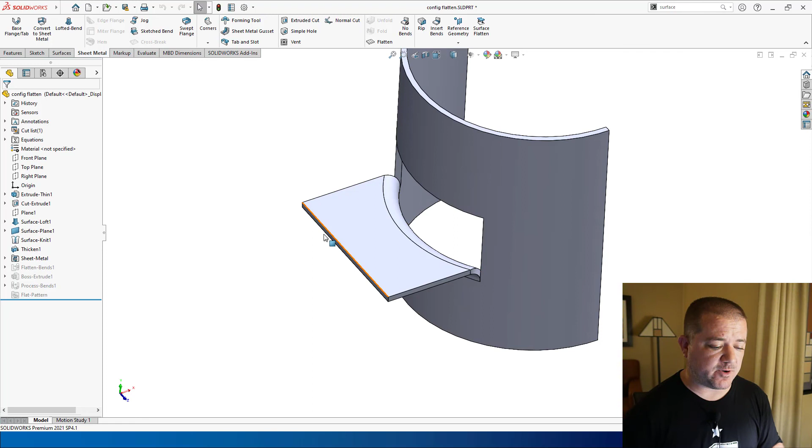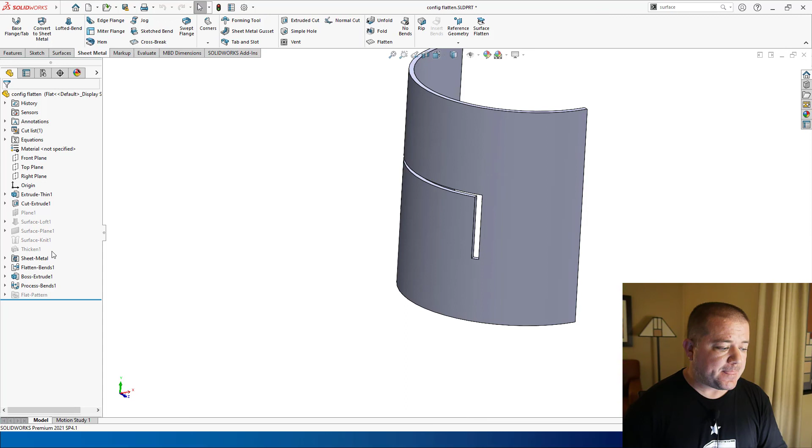And once I got that completely done, I switched my configuration. And SolidWorks always creates that default sheet metal flat pattern sub configuration. So why not just save it the trouble, create your own configuration called flat, throw away all that nonsense. I just suppressed it and created the geometry that I knew I wanted. Now, is that cheating? Yeah, of course it's cheating. Does it get me my print? Yes, it gets me a perfect print. This print says this is what the flat pattern needs to look like. This is what it looks like when it's bent.

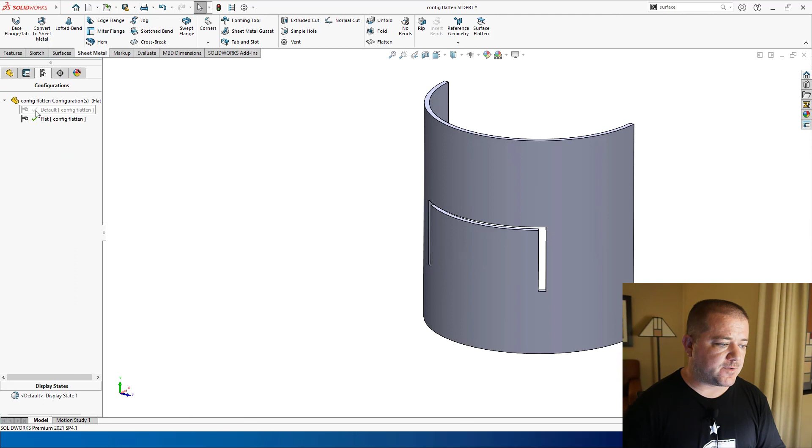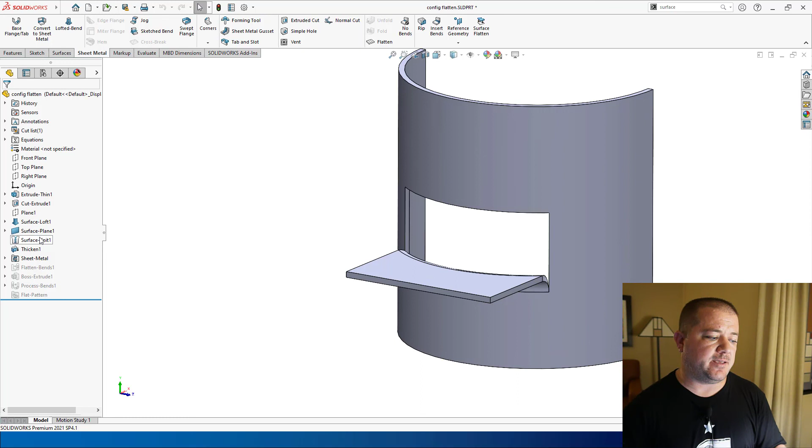Any questions, right? If you've got a feature like that where it's a bend on a bend or something like that, something really impossible, you're probably going to take the route of cheating. And that's fine. It's all good. The end result is what matters. One more note about cheating though, and it's not necessarily cheating, but it's an awesome workaround. In this case, I did a surface body. I did surface modeling to create that shape, and then I thickened it.

If you find yourself struggling with a part that's not actually constant thickness, maybe it's a wavy sheet and you want to flatten it, but it wasn't modeled correctly, so it's not constant thickness, and SolidWorks is bonking on it for some reason. Convert it to a surface. Take one surface face, knit it, right, or offset at 0 thickness or whatever, and then thicken it back up again. It's like an instant uniform thickness routine. Super, super cool. All right.

In addition to the cheating, you do have other options you can explore. I'm not going to promote or endorse any third-party products, but there are products out there that have the ability to do more advanced, especially drawing, stamping operations, things like that. There are better ways to do that. I would not recommend doing progressive die stamping in sheet metal. Can you get by? Yes, but is that your best way to do it? No. Like I said, those surfacing workarounds are great because not only do you have the power of surface, but then you can do the surface flatten, or you can thicken it and then try to insert bends that way.

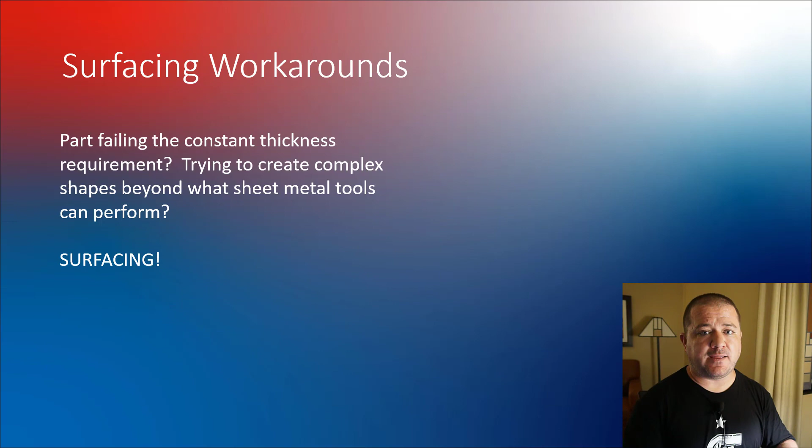So hopefully this was helpful. I hope you learned something. I hope you kind of squared your brain as far as how to flatten things. Keep in mind, there's never going to be 100% everything can be flattened, especially if you go to the surface flatten and that's like cheating, right? You may not also need a perfectly flat pattern. You may have to sort of start with a rectangle, bend it up or form it or draw it or whatever you're going to do, and then cut off the excess and then measure the excess and sort of reverse engineer it that way, right? However you do it, I hope you do it.